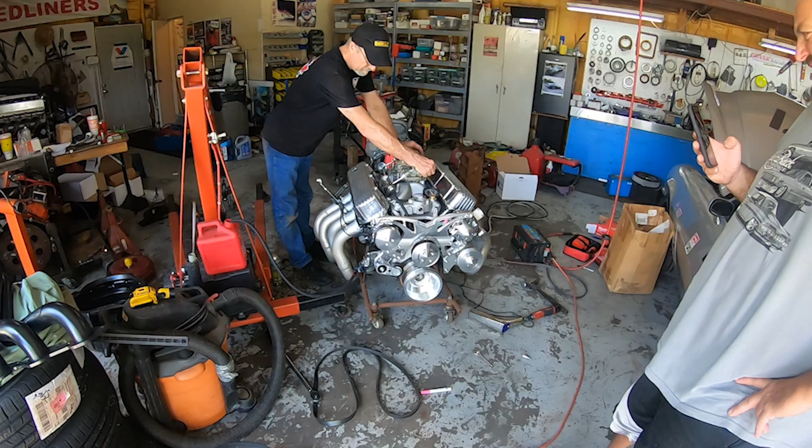All right, so I thought this was pretty cool, so I thought I'd make a quick video about it. We got a little Miles electric truck. It's a little yard truck. Tops out at 25. Cool little thing, man. We're gonna be doing some upgrades to it here pretty soon, so I'll be making videos about that.

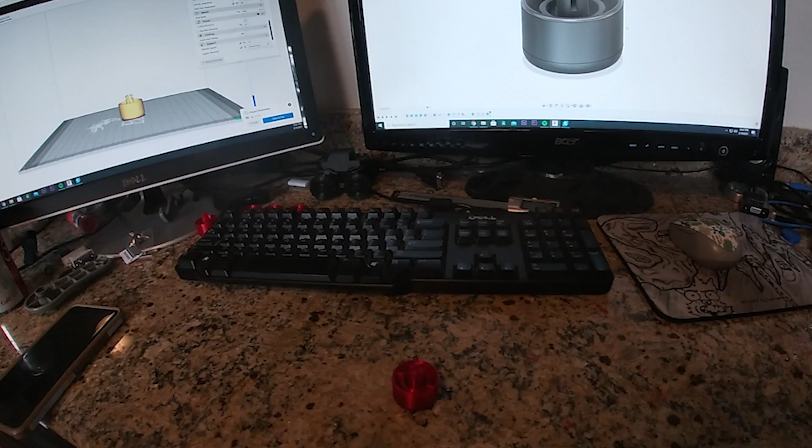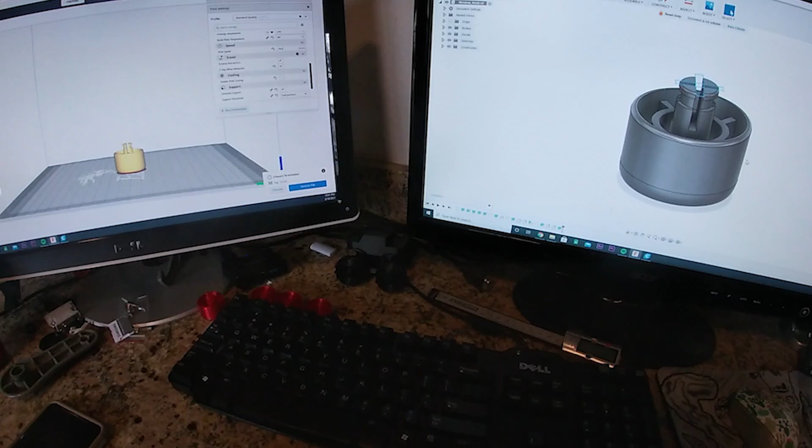But first things first, a bunch of the little plastic pieces in it have been breaking. So I have a 3D printer. It's actually really hard to find these things. Lo and behold, I'll just print them. That's the way I figure it. So I actually pulled the window roller upper knob. Keeps breaking off. Both the originals broke. So

jumped into Fusion360 here and CAD-ed out a new knob. Right, transferred it over to Cura over here, so you can see it transfers nicely. Sliced it. It's taken me quite a few tries. You can see all my trial and errors here. Getting the depth of this cut and using the correct plastic was important. I'm using PETG plastic to print these because it's got a little more flexibility to it.

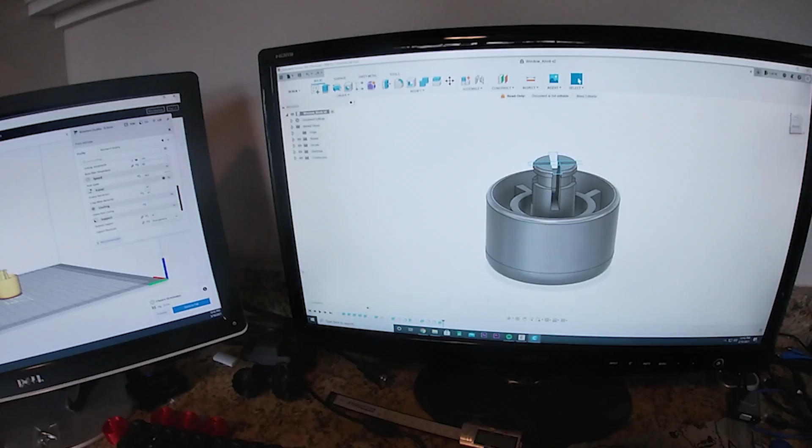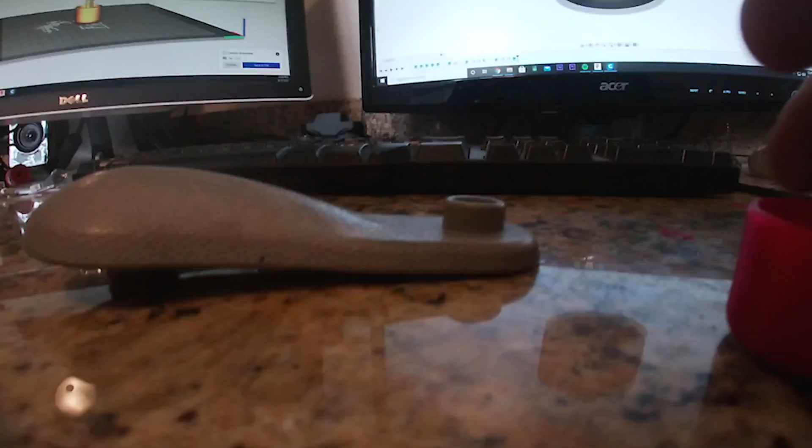I'm actually getting ready to fire off a spare just to have it, but essentially the way this window arm worked is this just literally presses in. It's got to squeeze down and then pop back to retain. So here goes nothing. Bam. Here we are. In there, not broken. Perfect.

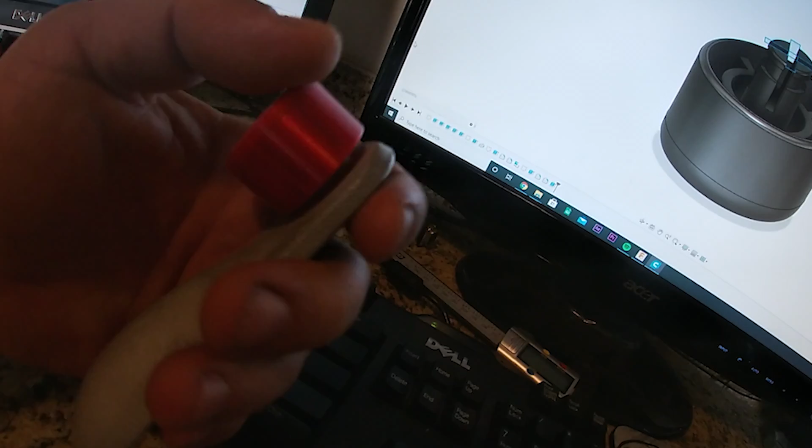I need to do a little more cleaning up here and sanding. The structure, it has to have structure because of the shape on the bottom, and I put these GC on there for Green Castle. The structure is really tough to get off this stuff, man. It bonds to itself really well, but it's supposed to be strong and flexible, so we'll see how it holds up. I'm gonna print a spare right now just to be safe, but let's go stick this one on the truck, man, and roll it up and down, see how it does.

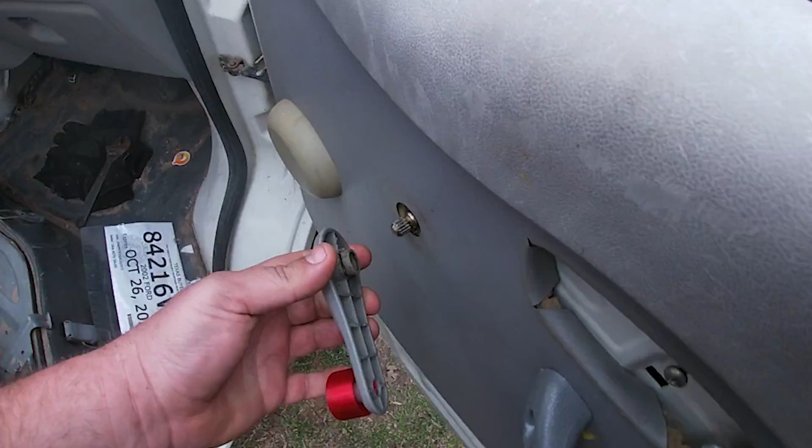All right, here it is. Little Miles electric truck. You can see we've already put the oversized tires on the back. We'll be building a lift kit this week. Lift the front up, get matching tires. Probably prep this puppy and paint it, not gonna lie. The interior will come after. Let's see, squeeze this down on here. Boom. Look at that. Look at that. Got a window knob again.

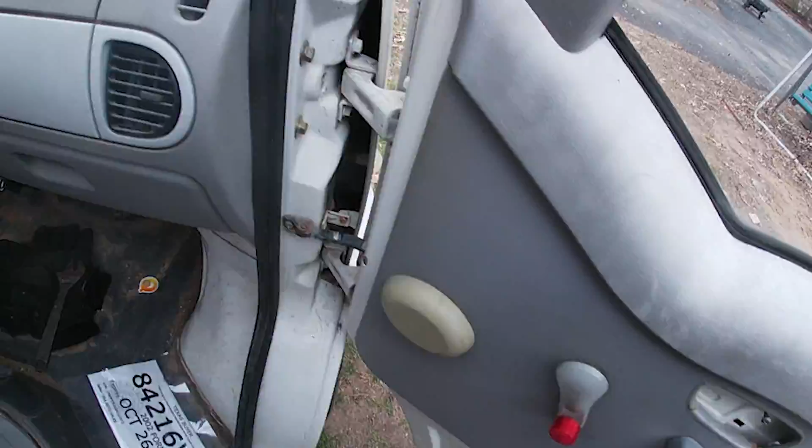So the next step is, you'll notice these door handles are all broken. They also broke. So luckily I have access to a 3D scanner, so I'm getting the back plate scanned. I'll be printing the back plate. I've already CAD-ed out the door handle itself, so I'll be printing those and installing those soon. I also need to figure out a way to do the speaker grate, and I'll just replace both of those. And hopefully every piece of plastic in this thing, we'll just print it as they break. Otherwise, we'll clean up this outside here, get a cool little truck.